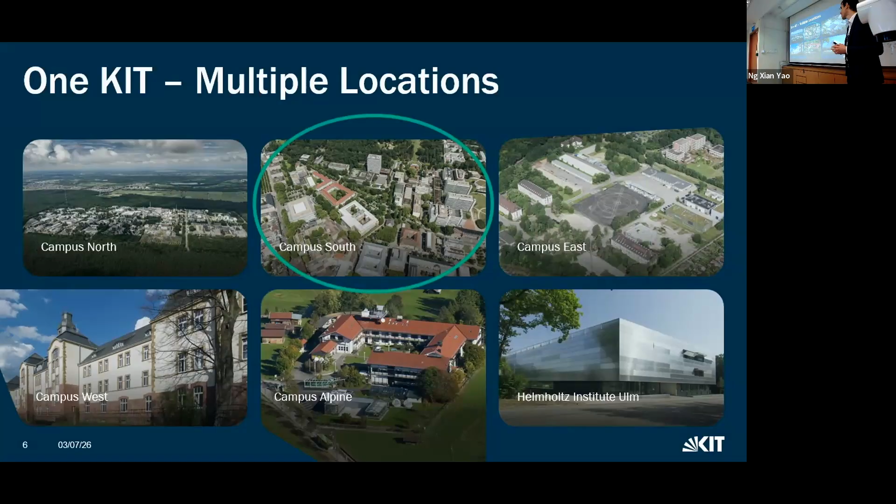Our institute, IRS, stands for the German Institute of Regelungs- und Steuerungssysteme, in English the Institute of Control Systems. We have 2 main buildings, and we work in this villa. The funny thing is it used to be the living residence of one professor back in the 60s. So I tell my students, hey guys, you know where I live, if you have problems, knock on my door. It's a really old and nice building where we work.

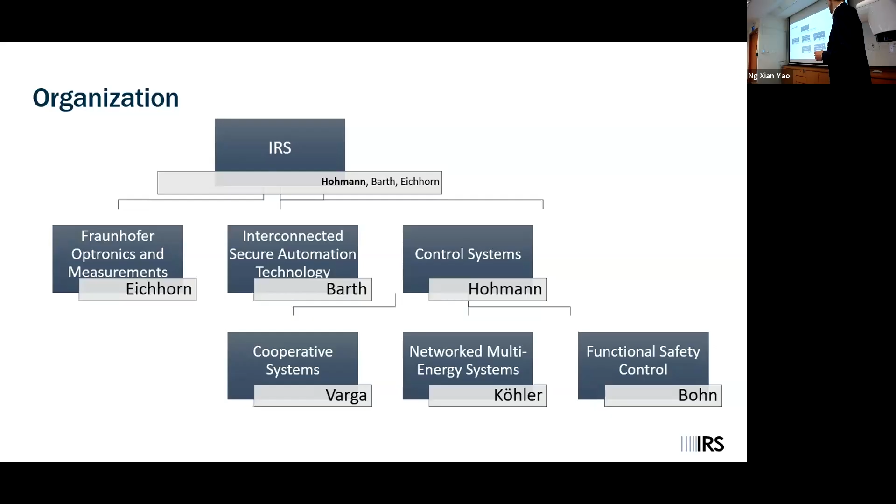There are 3 full professors in the institute. My professor is Professor Hohmann of the control systems group, and I'm leading the cooperative systems group - you can check the link for exactly what we do. We are designing human-machine systems, designing robotic systems which can support and help humans doing their work. I have seen some of your research and thought, okay, you can fully automate it, but you can also use human-machine solutions, and sometimes our human-machine solutions are more sustainable, or easier to deploy.

Yes, some of the colleagues do very theoretical research. So these 4 of them are doing very theoretical research. And there are also practical applications of our research. What we are doing, many optimal control and games. So we are doing differential games where you have many optimization problems, but you will see later in the upcoming slides.

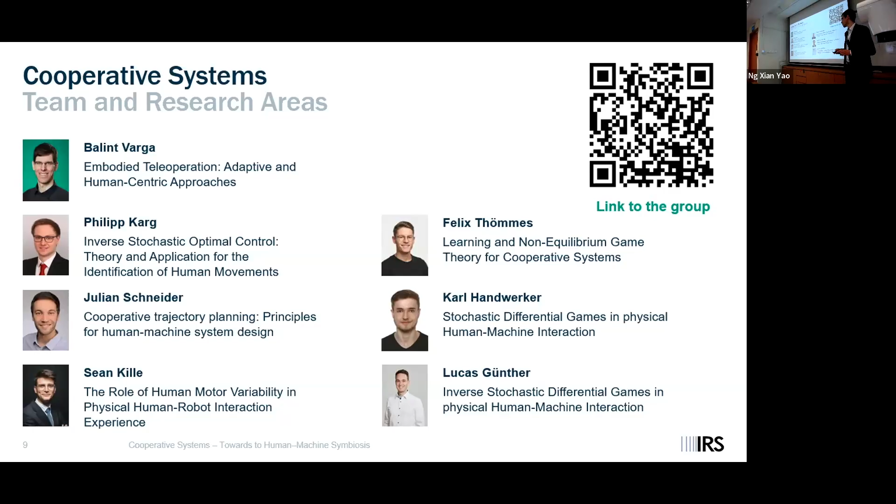And who I am? Well, I'm Balint Varga, and I came originally from Hungary. So I was born and raised in Hungary, and I did my bachelor in Hungary in mechatronics. And after that, I went to KIT to do my master's in mechanical engineering. And after that, I had the possibility to start work in a research institute where I decided, okay, let's go for the PhD. In Germany, a PhD is a little bit different because you are a research associate, you do research work, you work on projects, and during that time, you have the opportunity to do your PhD. So you are not a student anymore, you are basically a lecturer, you do projects, you are writing proposals as a PhD student. So you have different responsibilities than in the States or in the Netherlands.

And that's why I started as a research associate, and during that time, I decided to do my PhD. I worked as a developer at Knorr-Bremse in the Research and Development Center Budapest for 1 year, just during and after my bachelor thesis. And I worked as a research assistant and research associate at FZI Research Center for Information Technology. And in 2020, I went to KIT for different reasons, and I've been there since 2020.

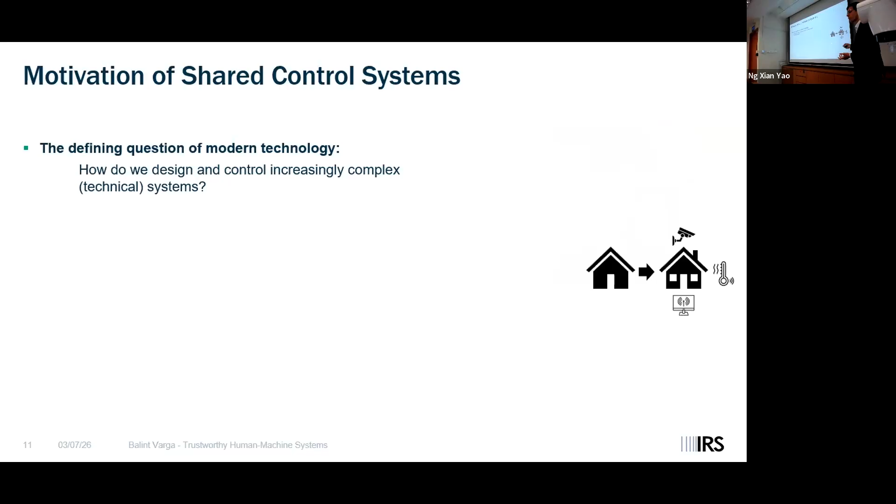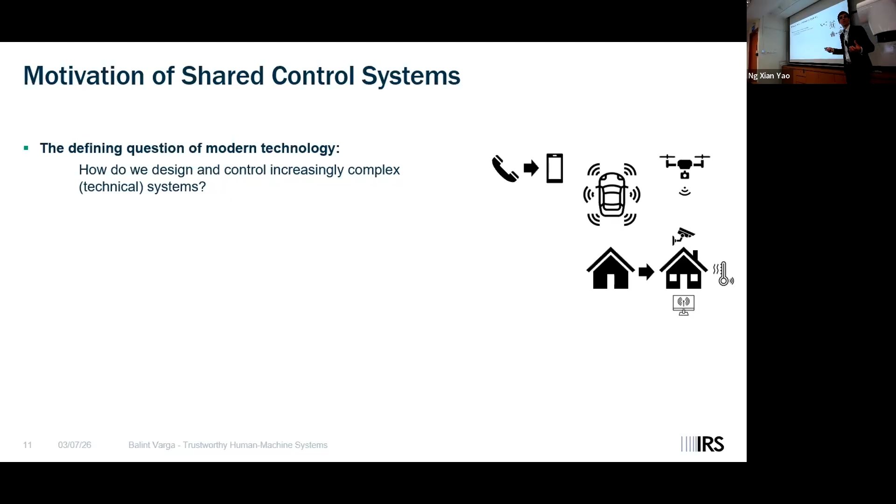Yes, the very first question you would ask, why shared control? Why do we need somehow a more general view of technical systems where the human is also involved? We have systems which became more complex, and technical systems also include many different applications. Think about your home. Think about your smartphone, from simple to a complex system. Think about autonomous vehicles or drones, unmanned aerial vehicles, or many other applications. It's a roadside cleaning vehicle in Germany, a mobile robot at IRS. And this is one of our projects, what we are working on, how to help elderly people in their elderly situation.

And the question is, well, are full autonomous systems driven by generative AI, ChatGPT, and is it safe? Are they safe under uncertainty? What if you have a human in the loop? If there is a human who deals with you, who's there and does something, and how do you handle conflicts if you have conflictive situations? What do you do there? And do you trust your AI-based controller? Are they hallucinating? How can you verify the learning effect of that?

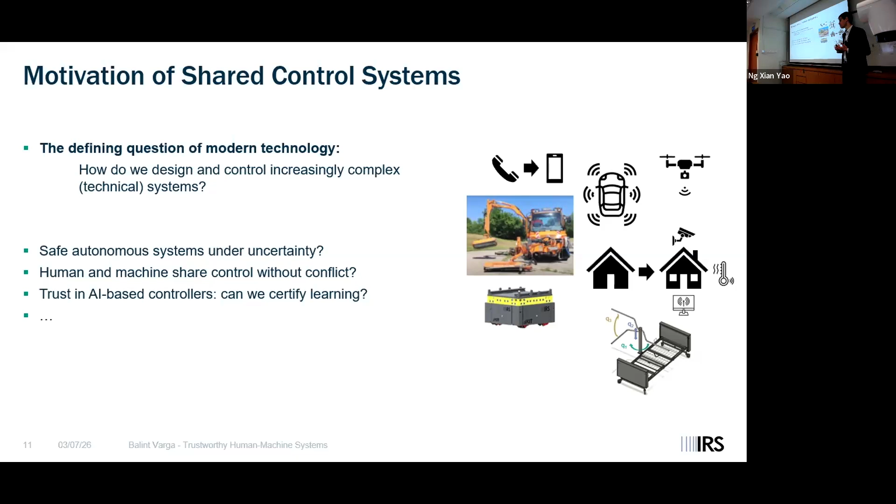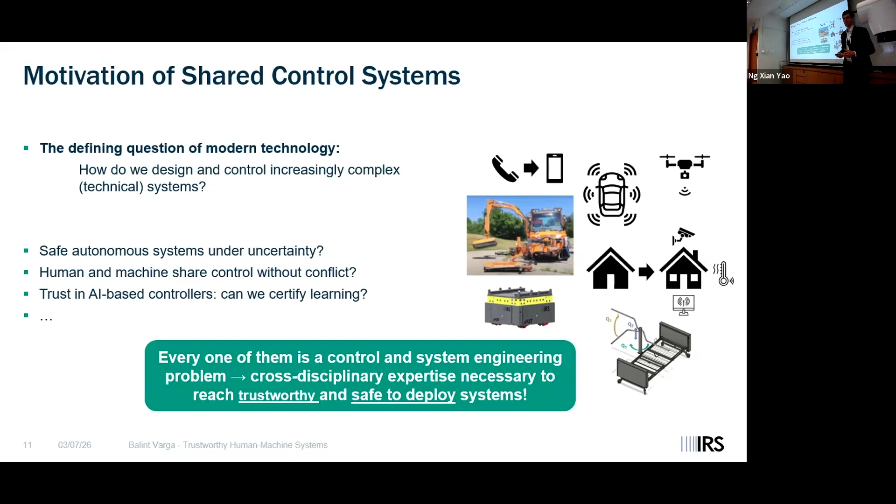And many other questions which are addressed in different ways. So you may have AI systems which are verified. We are going from the other way. We say that we look at these problems as control engineers and system engineering problems. So we create models. We use cross-disciplinary expertise to design models, and from these mathematical models, we can create trustworthy and safe-to-deploy systems. So we can explain everything which happens there. We can explain why the controller didn't work, and it helps you to deploy the system safely and more trustworthy.

I will provide you a short introduction to shared control, what it means. Then I will present you some practical projects, what we are doing at KIT and with Obuda University together. And finally, you get some of my visions, what I'm working on currently on my habilitation. And I'm really happy if you can provide some feedback for me.

So why shared control? You have lots of systems where human and machine interact, like autonomous vehicles. The vehicle is traveling, trying to communicate somehow with the human, or assistive robotics. As I mentioned, we are leading the technical committee on shared control. And I think that's the most important thing, that also in the societal challenge roadmap 2030 of the IEEE Control Systems Society, they had a chapter on cyber physical human systems. So they also acknowledged we have to address how human and machine can not only coexist in a situation, but can live together in a harmonic, symbiotic way. That's the goal, to design safe systems.

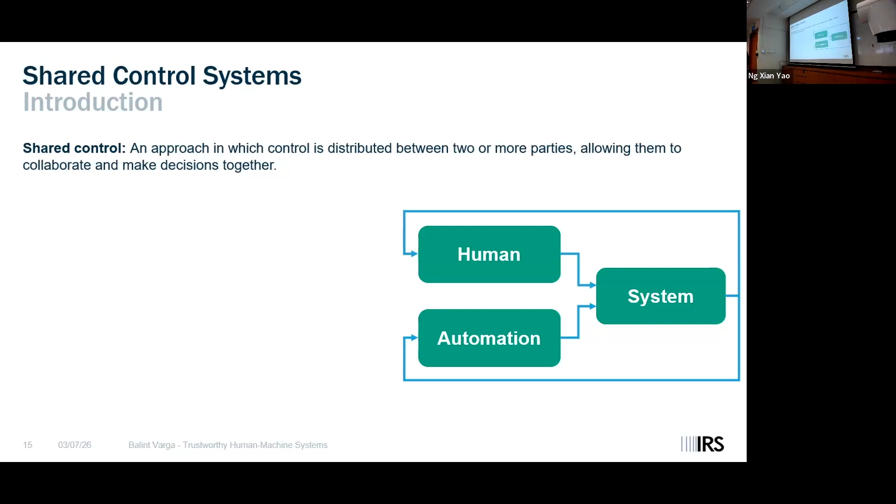So what is shared control? Shared control means that you have a system where two or more parties distribute the control and collaborate and make decisions together. In classical automation, you create an automation, you have some references, and you control the system, described closed loop or open loop, with different control concepts. We say, well, the human can also control the system or some parts of the system. It means you have to design the automation so that it takes not only the system into account, but the human as well. The goal is to have a cooperative and non-conflicting behavior.

So you can design an automation which can control the system perfectly. But if you don't take the human into account, it can be non-intuitive, conflicting, and not an easy to use system. Just think about your smartphone. If the application is not very intuitive, you won't use it. Or think about your lane keeping assistant or your adaptive cruise control in your vehicle. If it doesn't do what you would like to have, then you don't use the automation. So taking the human into account is very important.

And the easiest examples are vehicles, because I suppose most of you drive here in Singapore. No? Okay, okay, okay. It's easy to say in Germany because in Germany everybody drives. Okay, you never use adaptive cruise control. Okay, maybe that's not the best example.

But why do we do that? As a human, you have knowledge of the domain and context of decisions, so you can provide a more sophisticated reasoning in the situation. And the machine is very good at repetitive tasks, precision, and you can enforce safety limits. So, yes, that's what I also always bring up: lane keeping and adaptive cruise control. You have to come to Germany and try these systems. It's an honest invitation, if you want, come to Germany. And we have lots of applications in wheelchairs, shared control wheelchairs, within different countries.

And in the same way, you have the automation and the human cost function. The optimum of that optimization is a so-called Nash equilibrium. It's an optimum from which you cannot deviate unless you increase the optimal cost of your cost function. So you have to optimize both cost functions, and the human cost function is given, so you cannot design it. Our goal is to design the automation in a way that is good, trustworthy, and safe for the human.

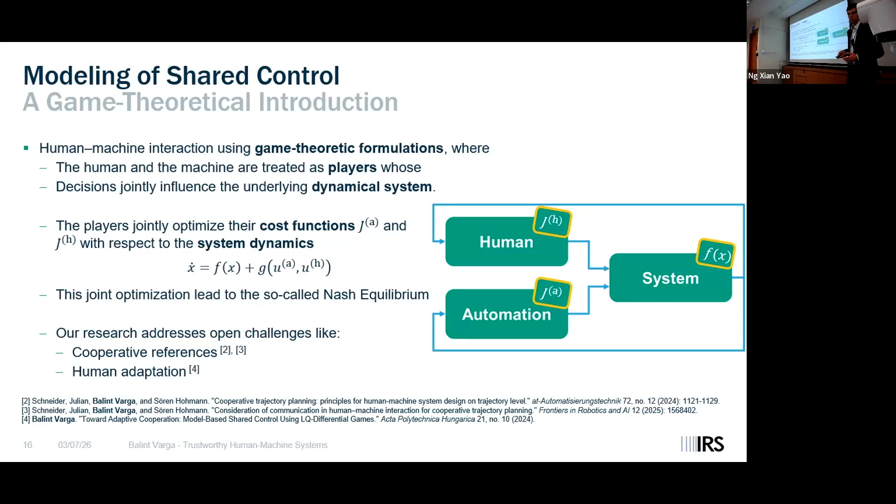And that's what we do. So we have the cost functions and we have the underlying dynamics. And in our research, we address many challenges. So if you have different references, how do you resolve that problem, or if the human adapts, you can also have different concepts for that.

And that's also one of my research areas, adaptive systems. We want to make the automation adapt to the human, but not using black box AI models, but using differential games and the mathematical basis of differential games.

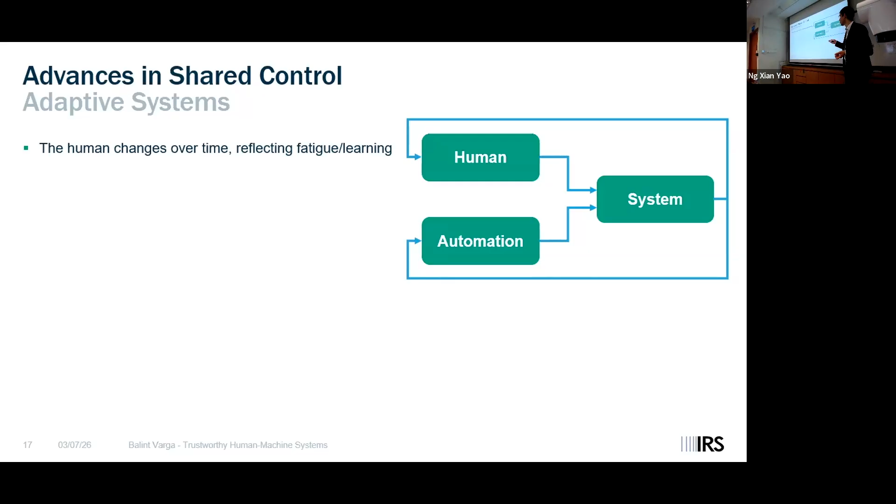You can assume that the human changes over time. You get more tired, you are frustrated, you learn to use the teleoperation system. Think about that, for example. The goal is that the automation adapts to this human variability. At the very beginning, you are very precise. At the end of your shift, you are not so precise, you make mistakes. And you can describe that as a variation of the model parameters.

Again, go back. Okay, optimal control. Everybody's there, optimal control, you did optimal control. Who never did optimal control? Okay. But you know what a linear quadratic is? In MATLAB, you have the LQR, and you got something from that.

And we can change the automation parameters to adapt to the human, and we have to solve the optimization problem online. Using that online optimization, we can adapt the automation. And for the adaptation, we can use it for personalization.

So do you have an experienced driver, experienced operator? They need less support. And we are applying that, for example, for medical systems, for surgeons. If they are at the very beginning of their shift, they are energetic and they can do their work very precisely. During the last hours of their shift, they are not so focused, not so concentrated. So the automation can help them increase system safety.

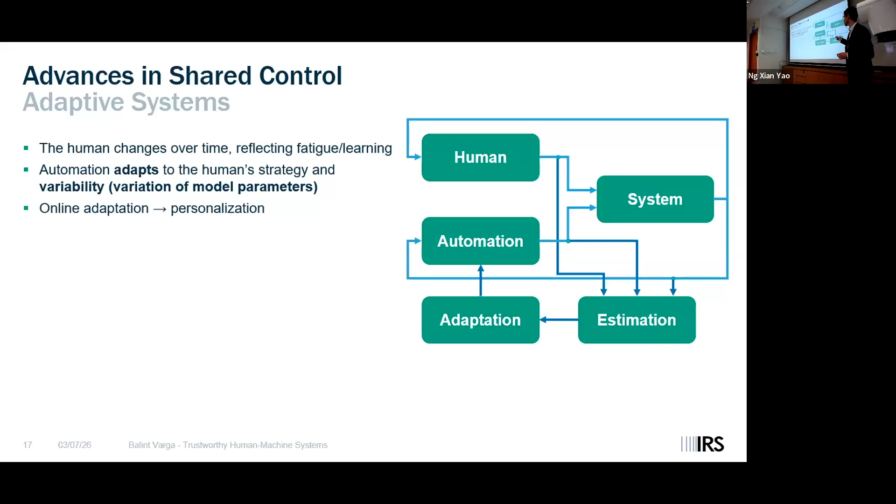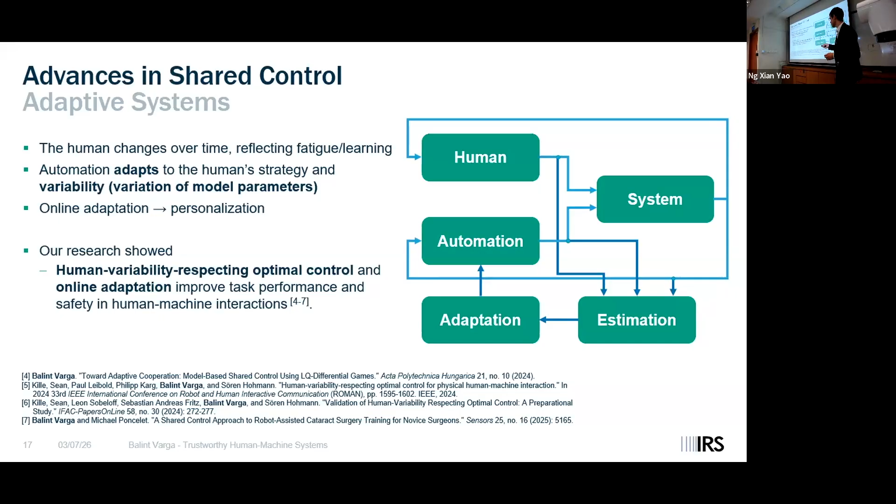And the funny thing is it has a similar structure to reinforcement learning. If you do model-free reinforcement learning, you have some similar aspects as we do here, because you always get feedback from your environment. And we have shown that human variability respecting optimal control, which takes the human, his decisions, and his variability into account for online adaptation, can improve task performance.

Yes, and I moved on in my PhD research to a very special class of differential games, the so-called potential games. You may think, well, what is that? What does it mean? The idea is, if you want to solve that coupled optimization problem online, it can be really complex. So let's replace that original game with one single so-called potential function, which can describe the original game in a simplified way. So we have the original system and we want to simplify it into one big potential function.

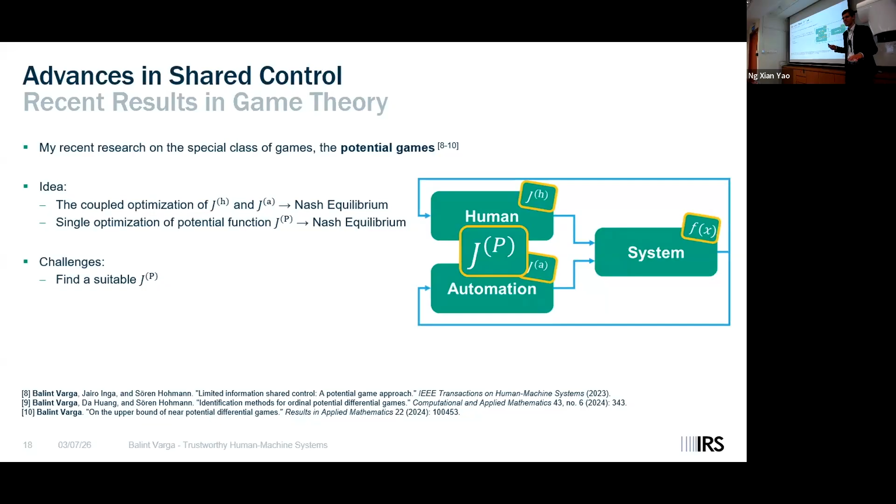The optimum of that potential function should also lead us to the Nash equilibrium of the game. So it simplifies the problem and makes the system more applicable for adaptive systems. And the question is how to find this suitable potential function. To be honest, in my PhD, I didn't find a good answer for that. That's the honest answer, I'm still working on that. I have undergrad students working on the so-called near potential differential games, and many of my ideas didn't work. So I'm really sorry for that guy.

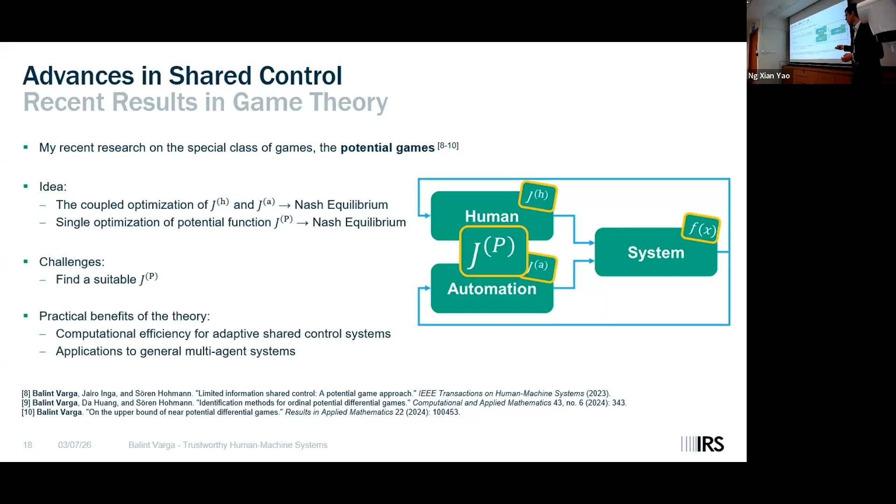But still we have some applications where we can apply that, because it increases computational efficiency. It can be applied to multi-agent systems in general.

And you can ask the question, okay, I presented differential games, potential games, why do we need models? We need models because we want to explain the system. And if you explain the system and we have a model-based design, we can be trustworthy, safe, explainable. So that's the core idea behind it.

Okay, that was, I hope, not too much theory. You are still with me.

I would like to show some of the projects we did in the last years. Sorry for these abbreviations, they are German ministries and German institutes where we get the money from.

We work a lot with automated vehicles and cooperative driving. We investigated what happens if you steer the steering wheel not alone, but together with the automation. Think about a full autonomous vehicle that tells you it's switching back to full manual because it cannot control the system anymore. This switching phase can be really dangerous. We proposed a transition phase between full autonomous and full manual, where you drive the vehicle together, giving higher situational awareness and a safer system. For that we use models.

We did lots of teleoperation in the Mars projects. DLR developed robots for Mars, and we were responsible for the human-machine interface and teleoperation.

We also have German autonomous vehicle projects on how an autonomous vehicle should interact in mixed traffic scenarios with pedestrians and other vehicles. We do basic research projects, healthcare projects, and micro-mobility projects, such as how an autonomous cargo bike can be used in postal service, for example in delivery, so you don't have to sit on the bike, but it follows you.

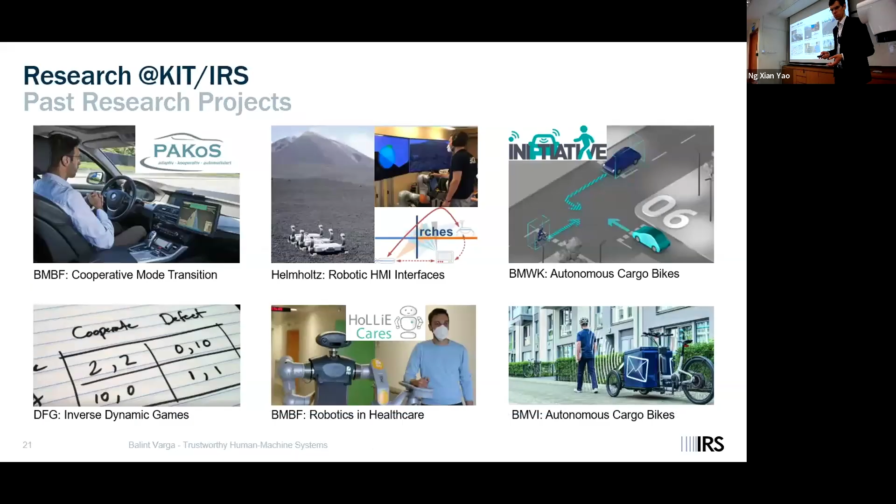These were our past projects.

I would like to highlight one of our projects on fire brigade search and rescue missions. We developed a drone at KIT, an indoor drone able to get into a building and find a missing person autonomously. For that we use radar, because if the building is dark or smoky, you cannot use laser or cameras. It was able to navigate autonomously without a predefined map of the building.

It was able to geolocate the persons, so the fire brigade didn't have to get into the building to find the person, only to get in and bring them out. This way they saved time - if nobody was there, they didn't have to go in.

What was the original idea? The original project was to build a fully autonomous system. But this turned out, after discussions with the fire brigade, that they don't like that - they want to click there, do that, do this - so we needed a semi-autonomous system.

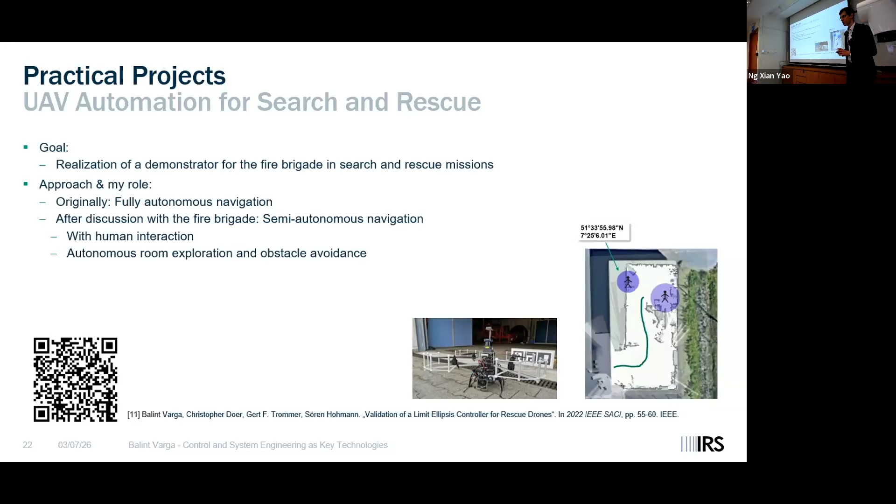So what we did: the leader of the mission was able to click on the graphical user interface and provide high-level goals, because they know where they want to go, and if they wanted to rotate or see something more precisely, they were able to override the commands. But the drone was fully autonomous between these points.

We developed a method able to avoid local minima and run on a very small NUC computer on the drone, so we had to take into account the computational power as well.

We had a modular system with the GUI and the ground station, where the fire brigade interacted with the so-called limit ellipsis controller navigation. We used the Pixhawk, and had onboard AI systems to detect the persons.

It was really interesting, I learned a lot because we set up all of the low-level controllers ourselves. I don't recommend you set up low-level controllers - have the right people for the right task and collaborate with your colleagues. I didn't have any colleagues there, I had somebody from some other tasks. I think it's also a very important learning for an institute, that you know the competencies and work based on your competencies together. But we learned how the system worked, and it was a really great experience for me.

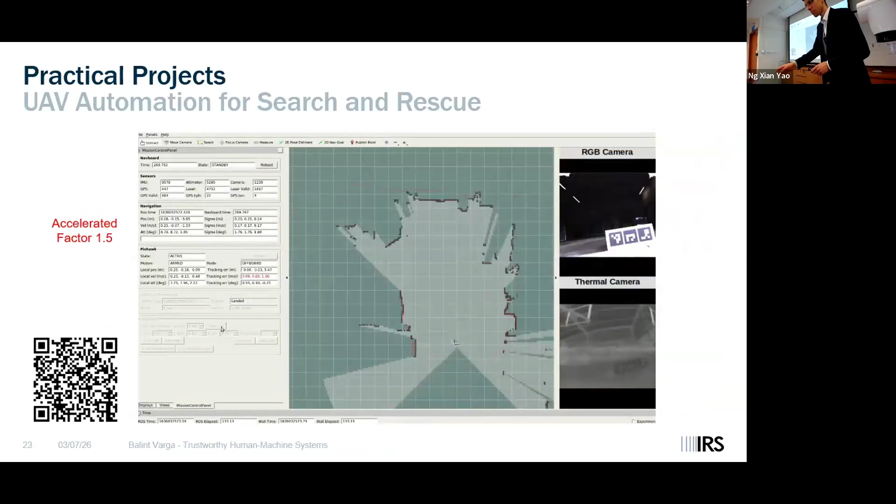And that was the result: the person was able to click there, and all of the navigation between the points was fully autonomous.

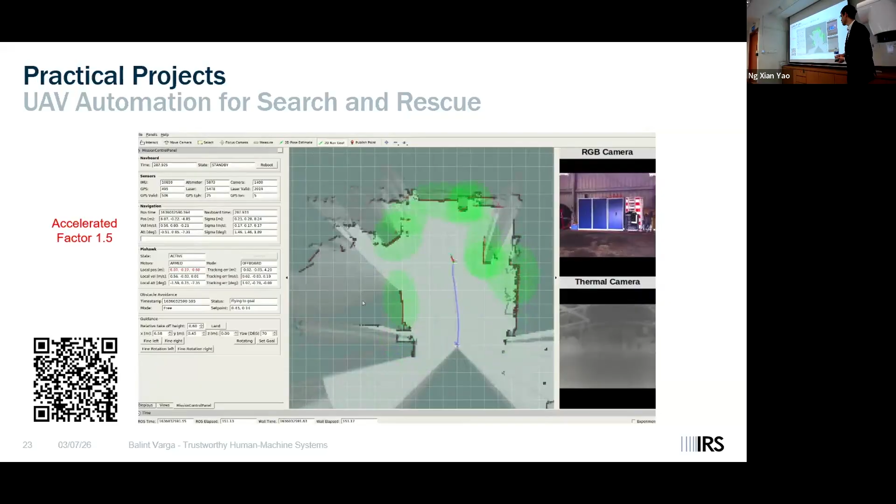What you can see are the ellipses calculated based on the point clouds. It was a dark room, so the visual camera wasn't able to navigate properly, and we also used a thermal camera, which also helped us find the missing persons.

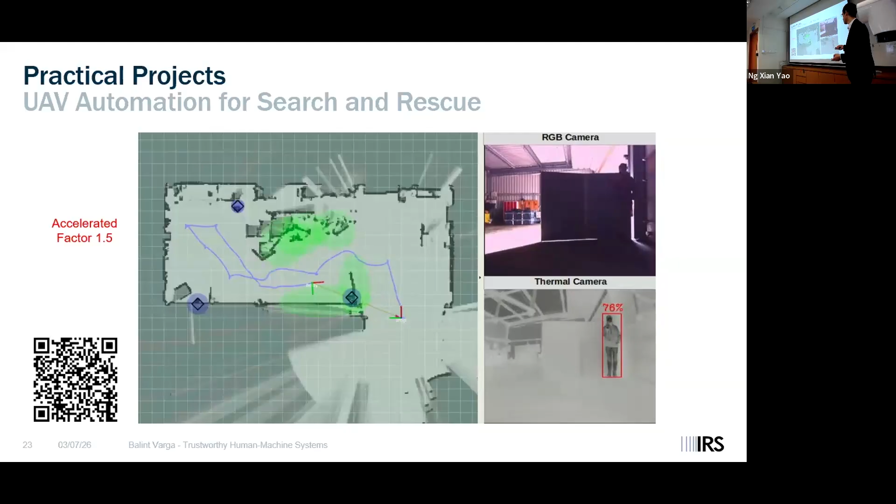And we used geolocation to have the firefighters know where they should enter the building, this entrance, from the back, and so on. It was a really nice project. Regretfully, we were not able to continue. Politics, finances, and so the drone is not functioning anymore in our lab. That's also a pity. But that's the German system. I can tell you later on a bit more.

We had also really nice projects on autonomous vehicles. Let's imagine the situation: you have autonomous vehicles in the city center. And if you interact with a non-autonomous vehicle in the city center, they are slow. You look at the driver, you communicate with your eyes with the driver, and if the driver looks at you, you feel safe, you feel trustworthy. And that was the issue. What if we have lots of autonomous vehicles and lots of vulnerable road users, pedestrians, cyclists? How can you increase the acceptance of the society?

And we addressed that with many German companies. What we did, and what was my role there, we designed a new pedestrian model to predict and interact at the same time. So it was an empirical mechanistic model. And we have shown in a demonstrator that we were able to address the fundamental challenges of that interaction. We had also some publications on that.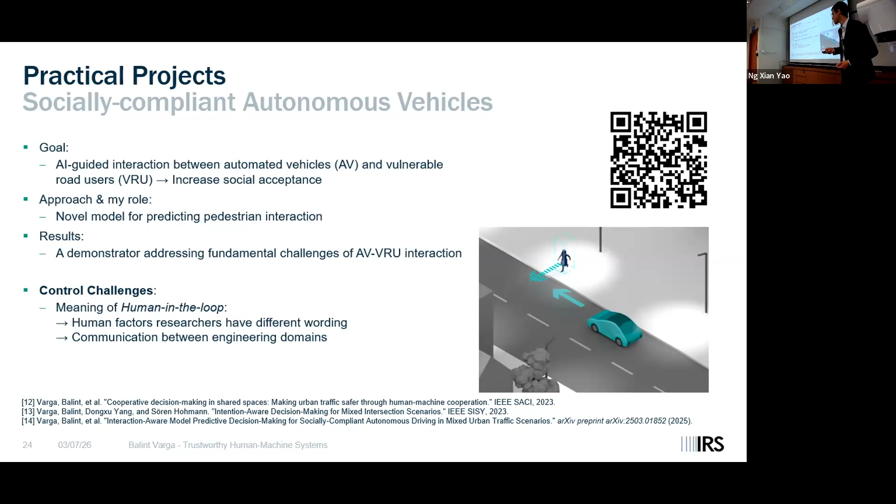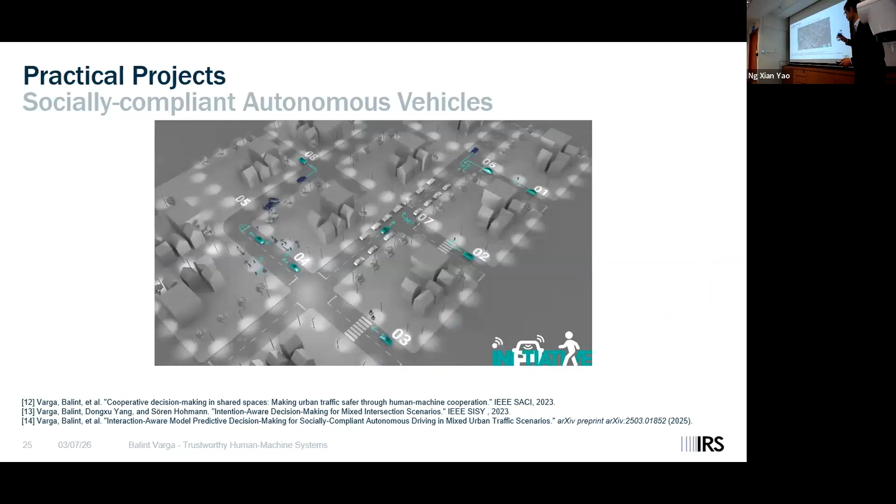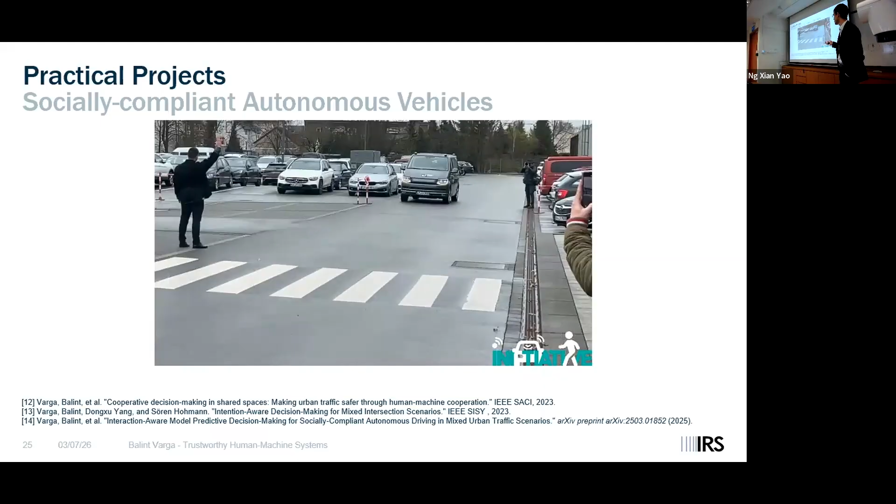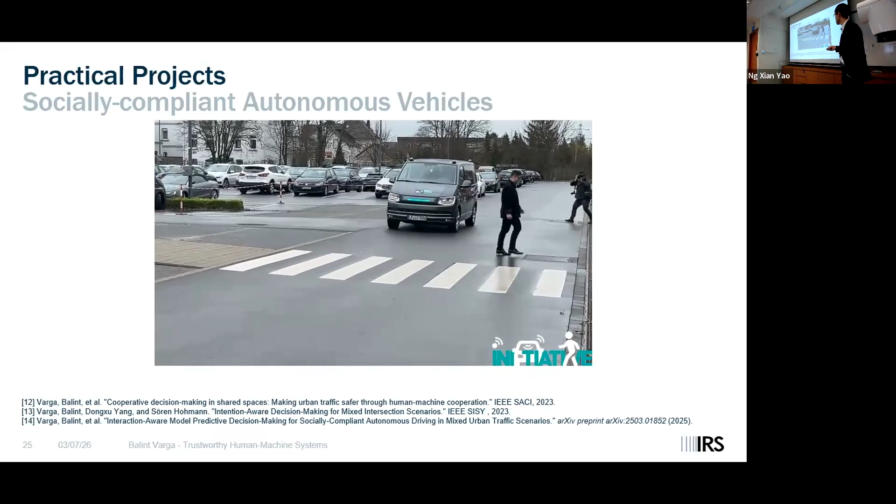And this is our final demonstration. Maybe I'll only show one of the scenarios. So where you cross, the people standing there, yes, that was, he communicates with the arm. That was also a limitation of the camera system. It wasn't able to see the person rightly. And instead of using eye contact, it was a fully autonomous vehicle, and it communicated through a visual panel. So that was the way.

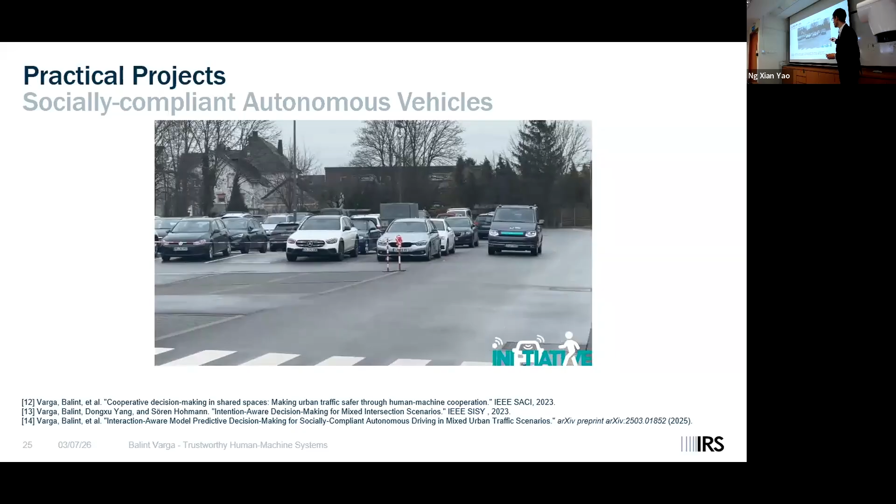It was also human factor engineers who thought about how you should use that part for the communication, what signs you're sending to the people, and it means: I'm crossing, I won't stop, please do not cross. Or if you have a pedestrian crossing, you can see the blue line: oh, I have seen you, I'm stopping. That's the message it's sending, I'm stopping and I'm waiting. So it's like you're looking at the pedestrian and you can be sure that it will stop.

We had some newer projects currently. I would like to highlight one of the medical robotics projects. We do have one company in Germany, and we have a really interesting standing up project. It means a cooperative standing up system. It helps people to get out of bed in a cooperative way. The idea behind that: you could build a bed which brings you up, and that's it, you are standing. But in that case, you are not training your muscles, and you have illnesses where it's very important, for example MS, multiple sclerosis, that you use your muscles, that you don't lose your muscles.

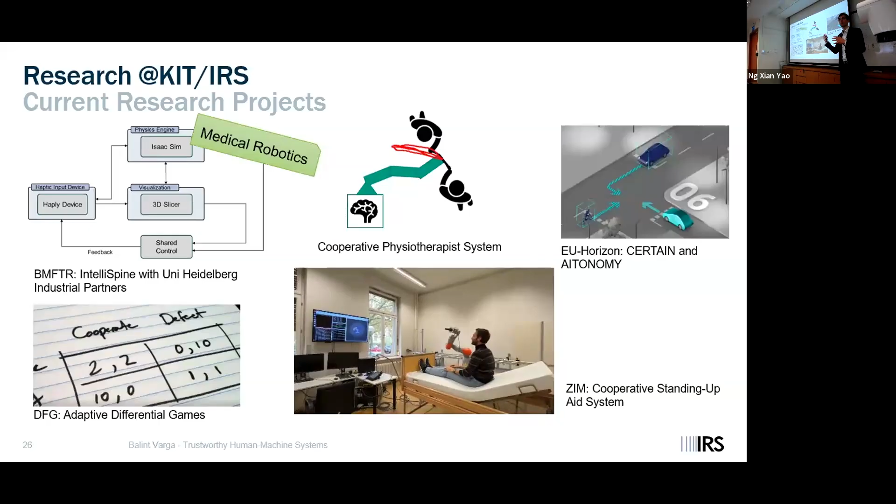And it's a system which enables a negotiation. If you pull more, it helps you more. If you pull less, it helps you less. So that's what Julius develops in his PhD, the negotiation between human and machine, how you can describe it with different models.

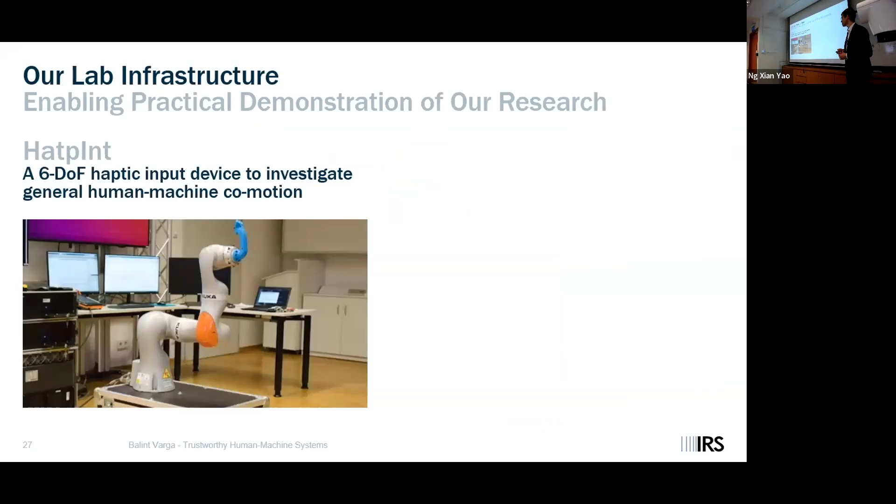What we do have in our lab as interface, we don't have so many nice things as you have, but we work pretty much with this haptic interface. We use the KUKA robot as a 6-dimensional human-machine input to investigate different human-machine interactions. We also have motion capturing systems to get data and to learn how the human moves, point-to-point motion and different motion.

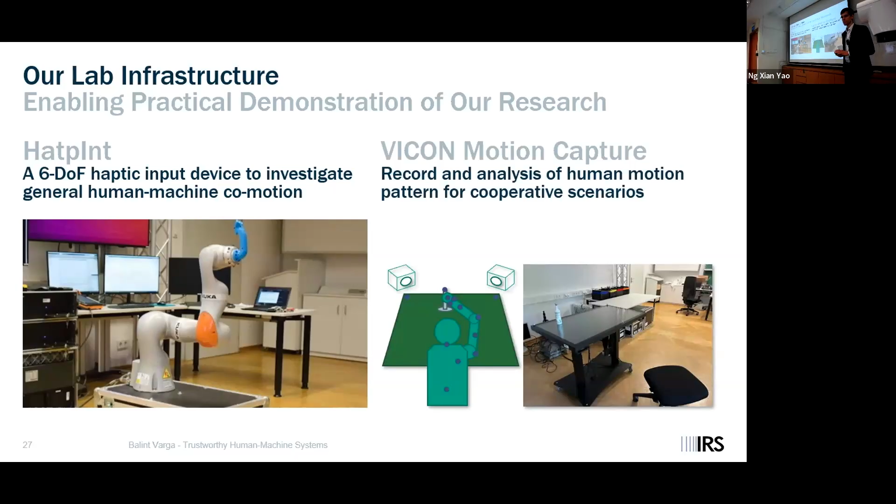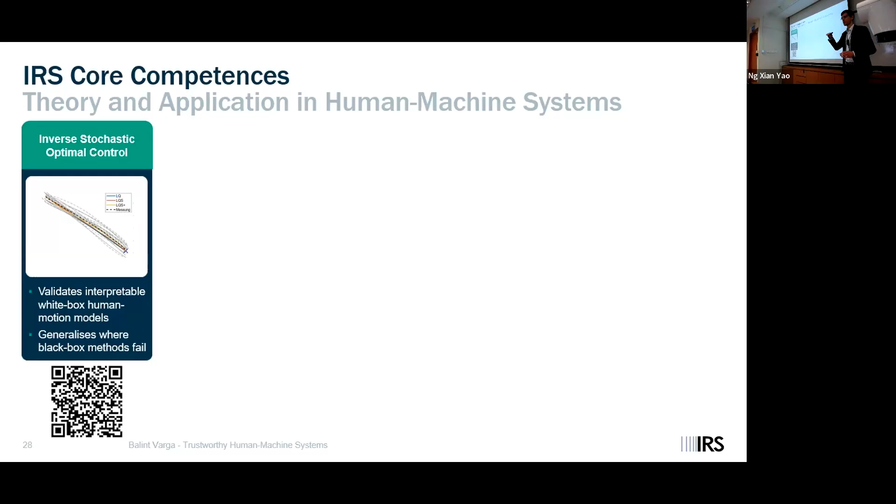Yes, I summed up my colleagues' research. Maybe I can send you the slides later on. It's really dense. What we do is optimal control, but inverse stochastic optimal control. You have a stochastic system, and you don't want to solve the optimization problem, but you look at the measurement data, and from that you want to estimate the cost function. So you do the inverse way. That's one of my colleagues doing that in my group.

So I mentioned negotiation in the cooperative system, so how you can negotiate references.

I have one colleague who just presented his first publication at IFAC 2026. He investigated gradient play in differential games. It turned out there are no model-based methods for that. Yes, you have lots of AI-based methods, but using a model and describing the Jacobian spectrum with mathematical tools, it's not there yet. So he's writing his Transactions on Automatic Control paper and the IFAC paper, and hopefully a Control Letters paper by end of the year.

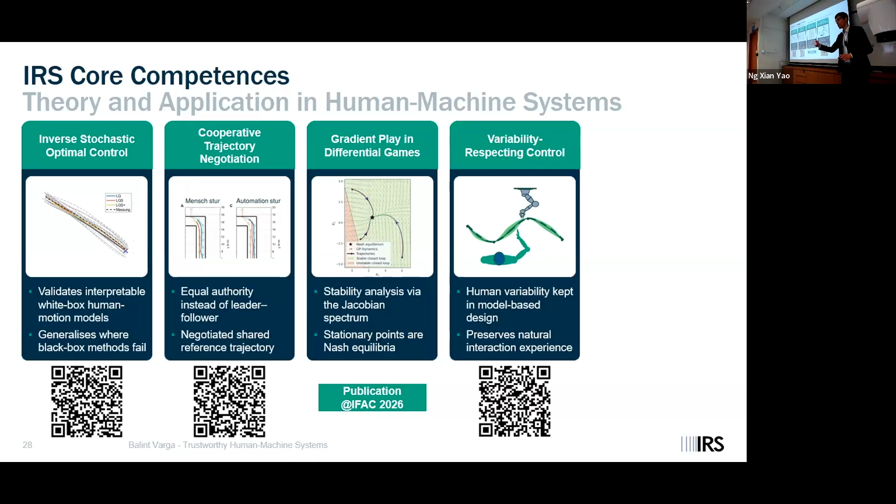Some more practical research: we investigated how human variability should be taken into account by cooperative motions. And we started the inverse stochastic optimal control with one player. If you have more than one player, you have inverse stochastic differential games. You do the same thing, you want to identify the cost function of your optimization, but you do the inverse method of that.

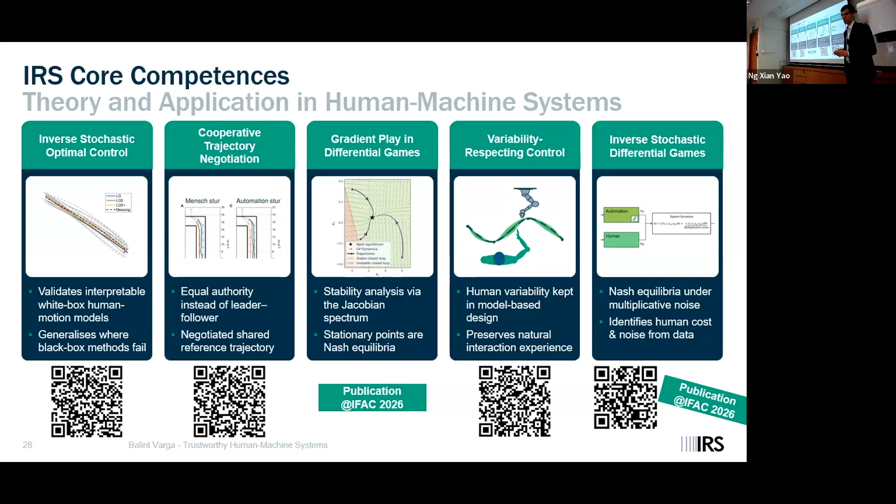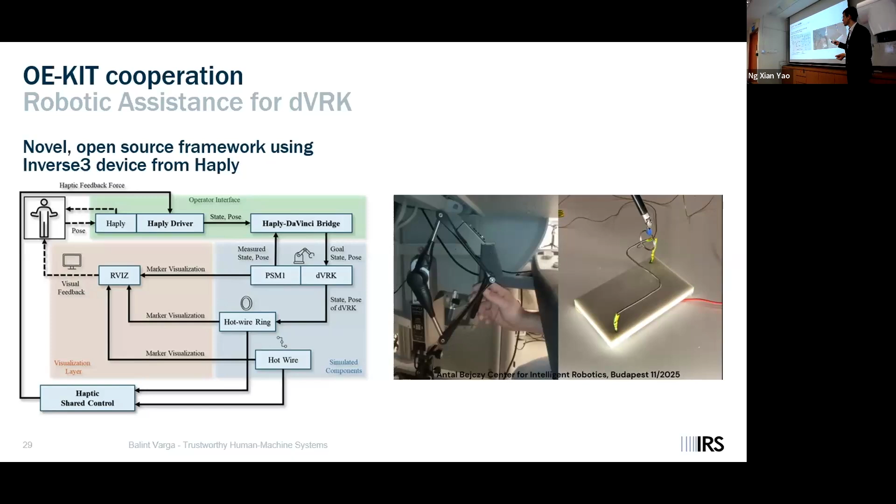And how I get here, I'm also working with Obuda University, and we have a really nice cooperation. We are sending students here and there, and it's really nice. We are focusing there also on how to design human-machine systems using the Da Vinci Research Kit. What you can see is the device from the small Canadian company, Haply. It's a really nice small company, they provide really nice devices, but you don't have all of the software. So in our current paper, we have written a bridge to Da Vinci, and we conducted some simulation and feasibility runs on the real device.

What you can see here is my students using a hot wire experiment. So you want to go through along the wire without touching it, and you can feel the force feedback if you are getting closer to the wire. That helps you to maintain the distance to the wire. It turned out the haptic feedback helps, it can provide you feedback, decrease the time of completion, and it's a useful tool what we should investigate.

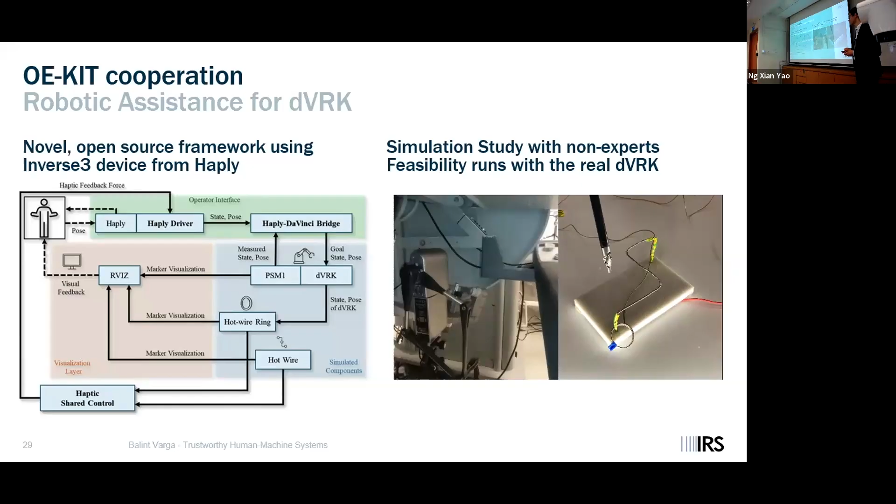I ask the question: are we going to need human-machine systems? If you talk with some other engineers, they will tell you no need for that, we have full automation and it's more superior. Yes, you have some applications where you don't need human-machine systems. We work with a factory, they are providing papers, Heidelberger Druckmaschinen, and there is no human in the factory, just machines.

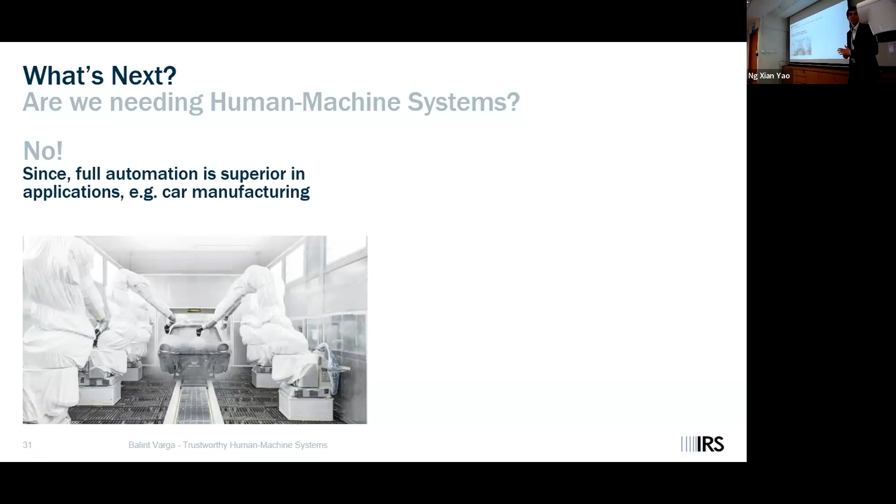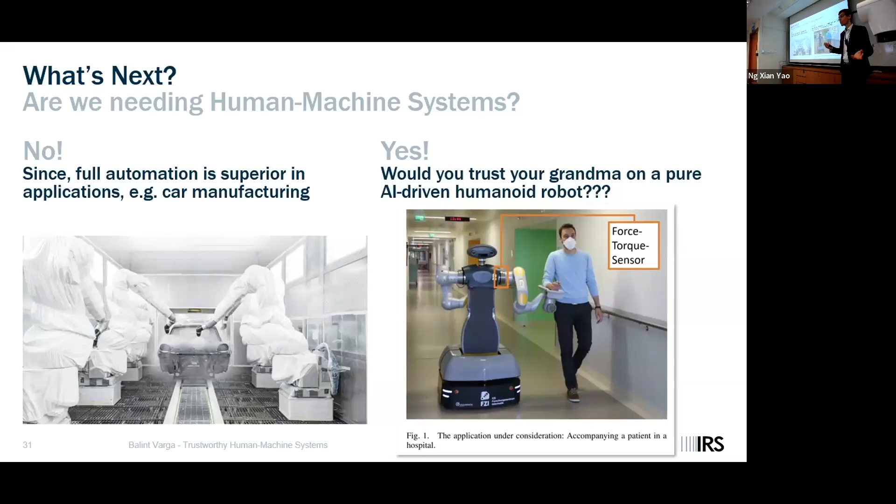On the other hand, yes, you need it. I was asking the question: well, your grandma is alone, far away. Would you trust a fully AI-driven humanoid robot to take care of your grandma if you don't get any elderly care in the region? Maybe some human-machine system, a teleoperated system, would be the answer for that. That's what we're investigating currently with Tamás and Professor Haidegger and Professor Galambos at Obuda University.

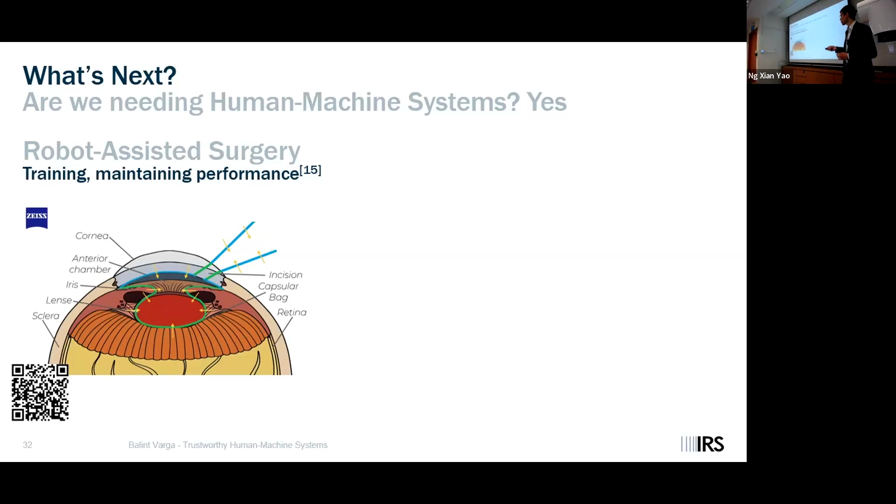What we should do, yes, it's with the company we are working together with, ZEISS. We worked on the cataract operation. Luckily we got one publication, but we had lots of other work from the last 2 years we weren't able to publish. We are investigating what kind of robot-assisted applications you need. There are lots of concepts in the literature, but they are not safe, trustworthy, and deployable. That's what we are working on, how to move to the field, how to make them deployable. And that's why you need models, to have the certification to deploy.

And also the question: we have had teleoperations since 1980. With Tamás from Óbuda, we went together and were in a workshop, the ERC workshop at a European robotics conference, and we had lots of discussions. Well, you have 6G, you have 7G, and the question is, is it a solution? Won't you have some human in the back who teleoperates the system? And which is the bottleneck after that? So how do you have to design systems that you can use for a longer time, how to switch between vehicle controlling - you are an operator controlling 10 vehicles in Seattle, in Silicon Valley - how can you make it safe in a good way. We've just published a paper in ICRA, teleoperation bottlenecks from the network-centric rather to the human-centered design, and how to design it.

I really hope that we can do lots of research on that topic, and I really hope that we find some common topics. These human-machine systems teleoperation, I'm really open to cooperate, and I'm really thankful to Peter Galambos, who is the PI of the Horizon projects where you are also involved, and I'm really thankful for being here, and thank you for the opportunity to present.